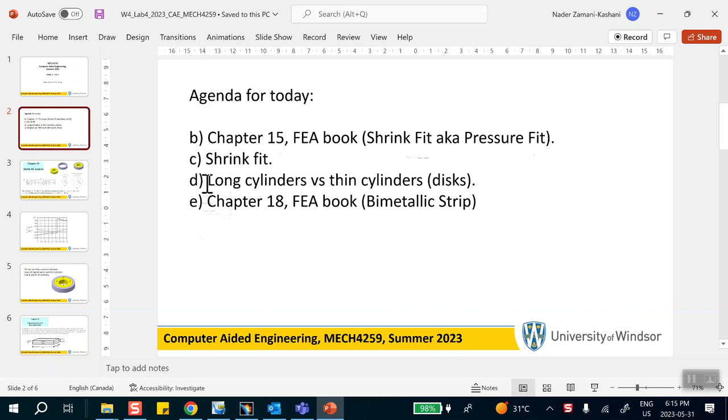Today, we're going to continue with assembly analysis. And on the agenda, I have basically two chapters that I want to do. One of them is chapter 15, which is a shrink fit or press fit problem. And then I'm going to assume that these two things that are shrink fitted are actually thin discs, but we'll talk about that later. And then once I'm done with that, I'm going to do chapter 18, which is a bimetallic strip. So let's start with the shrink fit problem.

Suppose we have two discs like that. Let's pretend that these are actually not very long. So think about it as thin discs as far as the thickness is concerned. One of them is made out of bronze, and the other one is made out of steel. So the gray one is made out of steel and the yellow one is made out of bronze. Now, if you look at the dimensions here, you see that actually the outer diameter of the bronze is about 0.002 inches bigger than the inner diameter of the steel.

In other words, if you wanted to take this bronze piece, the yellow piece, and stick it into that gray one, it won't go through without damaging it. So the way they put this thing in there is heating up, for example, the steel piece to make it a little bit bigger, and then put the bronze piece in it, and then let it cool down. This is called the pressure fit or press fit problem. Because this bronze one is a little bit bigger than the steel one, it's going to get compressed, and the steel, once it cools down, is going to get pressurized from inside, under tension.

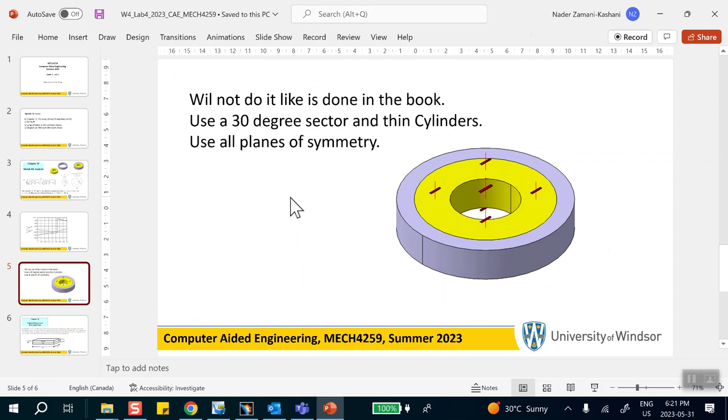If you take a thin disc, there is a plane of symmetry halfway through that you should use. If you're asked to use all planes of symmetry, and I'm asking you to use a 30-degree sector and half the height. I'm assuming that in this particular problem the height is 1, although it's not specified here. So when it comes to modeling, I use half an inch only.

So let's go ahead and make this thing, and because I know exactly what I'm going to be doing, half the height and a 30-degree sector, I'm not going to make the whole model. I'll just make that particular portion of it. So let's start with the product file. Immediately save it. So we go to File, Save Management, Save As, Desktop, New Folder, Shrink Fit. So this product is going to go there.

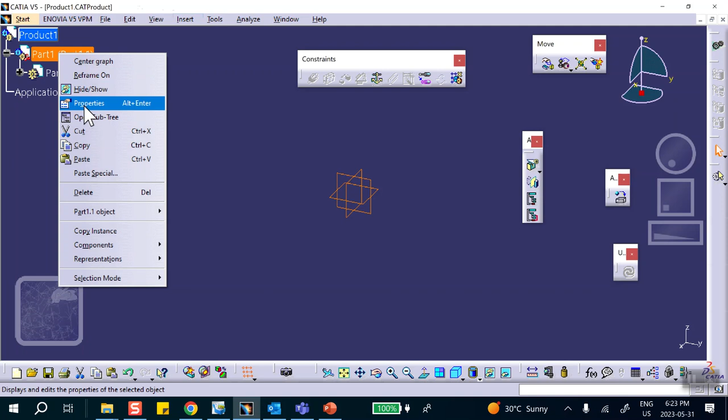And then I'm going to make a rectangle and shaft it to get the bronze piece and then to get the steel piece. So insert a new part in there. Let me do the steel first. Right click properties. This is steel outer ring. That is the instance name, and we go down here: steel outer. All right, so let's go make it. Double click on this. On that vertical plane, I will sketch a little rectangle.

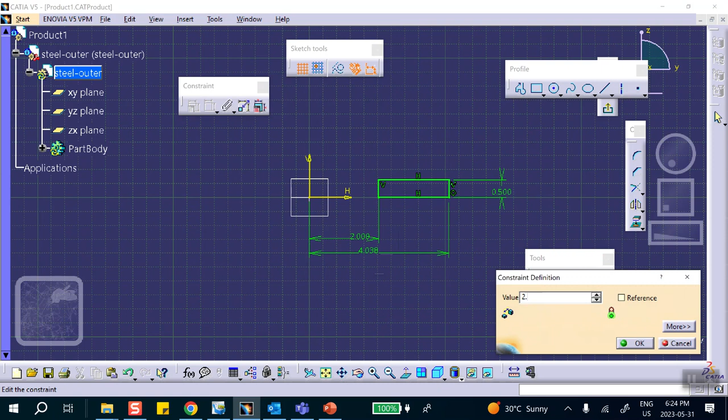The height of this rectangle is 0.5 because we're taking half the height of the assembly. The inside radius is 2. The outside radius is 2.5. So let's go put some dimensions there. These are in inches. From here to here, this is 2. And the outside, the dimension from here to here is going to be 2.5. And we say OK. So this is the steel ring, exit.

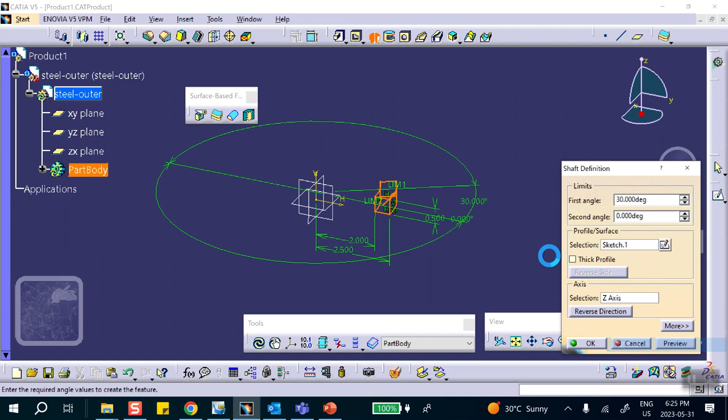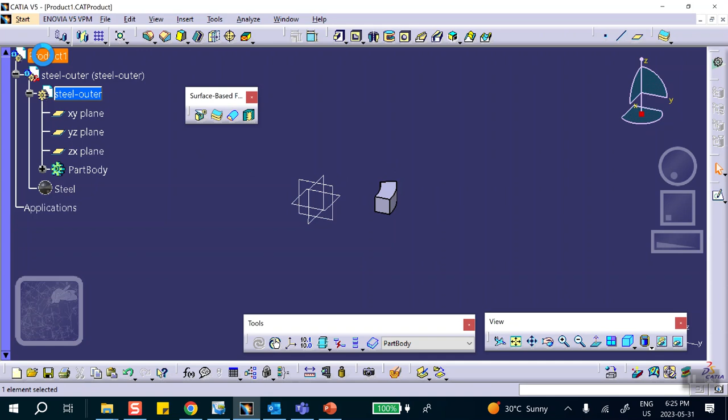And shafted by 30 degrees. I put the cursor there, right-click Z. There we are. So this is the steel piece. And I'm going to put material properties on it. So apply material, steel on that part, and we say OK. Good. Now we're going to make the bronze piece. So we go all the way to the top, click on the floppy so that everything is saved,

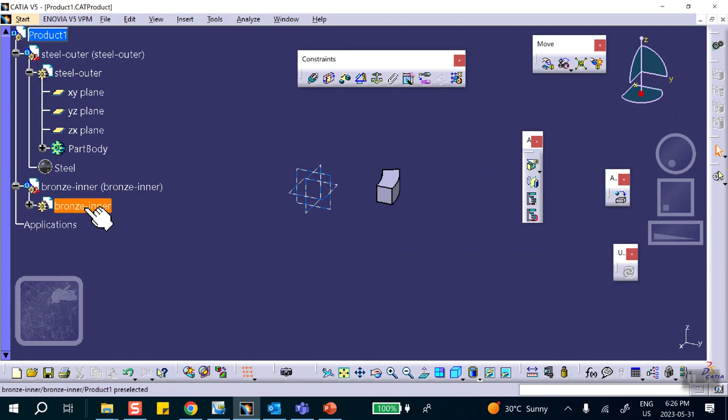and then insert a new part, say no, and call this thing bronze, properties, bronze. And this is the inner piece. This is the instance name, right click copy, and there's the part name there. Paste. There we are. We say OK. Let's make it. Double click on this. On that same vertical plane, I will sketch.

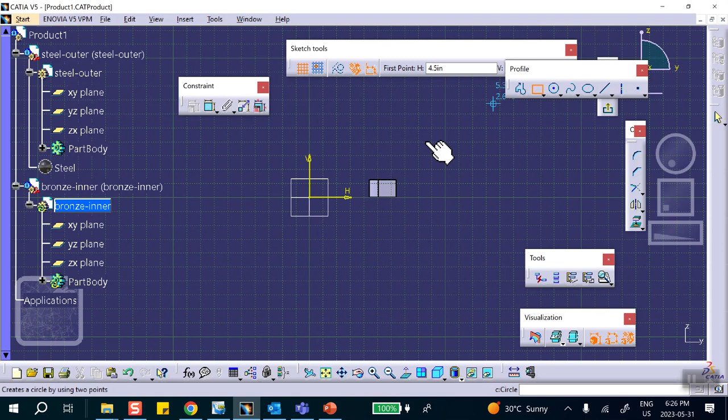Now, the inside radius is 1. Remember, the nominal outside radius is 2. Although it's a little bit bigger, 2.001, we don't gain much by changing from 2 to 2.001. So I'm going to use the nominal dimensions for making this. Let's make a rectangle. Clean it up. So the height is 0.5, just like the steel piece.

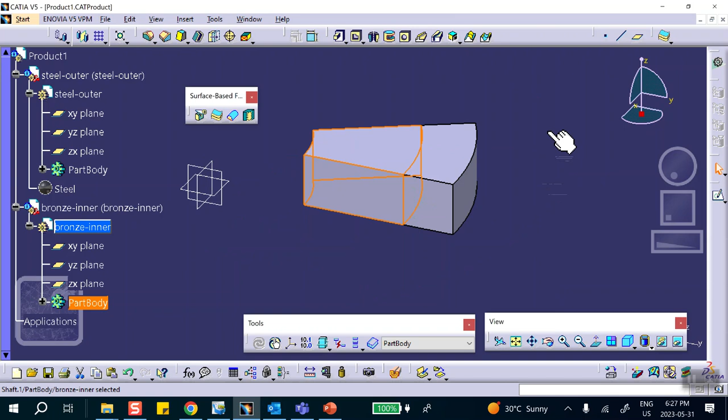And the distance from here to there was 1. And the distance from here to here is 2. Not 2.001, but 2. So notice that they actually touch exactly at the same location up there. So we exit, and once again we shaft it by 30 degrees along the z-axis. There we are. And let me change the color of that.

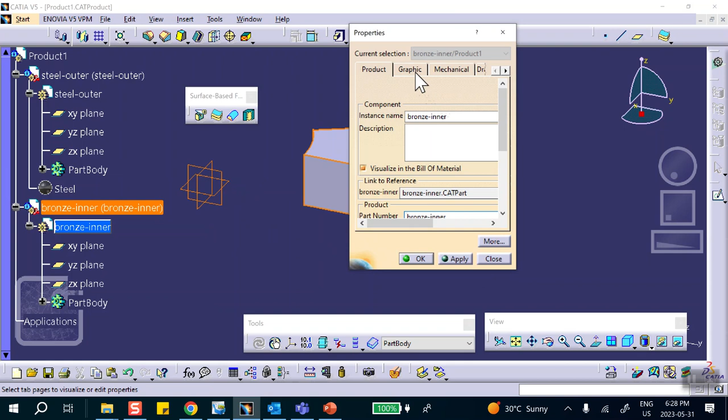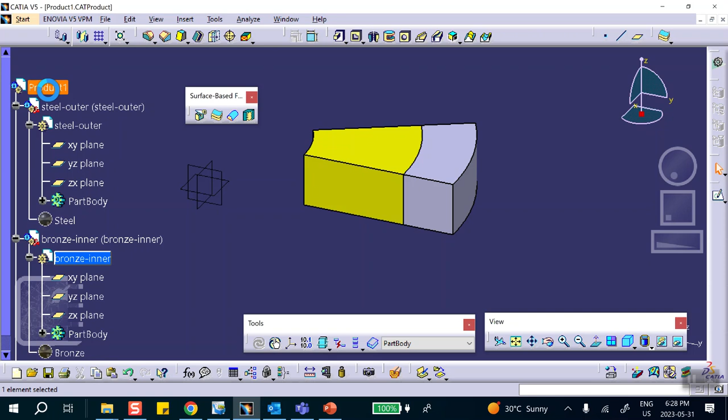Right-click, properties, graphics. I may have to do it from, close that. Right-click, properties, graphics. Make it yellow just so that it looks like that. And then I apply material properties on it as being that of bronze. So click on it, bronze on that part, say OK, and there we are. So all the way to the top, and save it, floppy.

Remember, if this was a problem on the final or on the midterm, you have to give us the bronze piece, the steel piece, the product, and the CATAnalysis file that we're going to do later on. Okay, good. That's pretty much it.

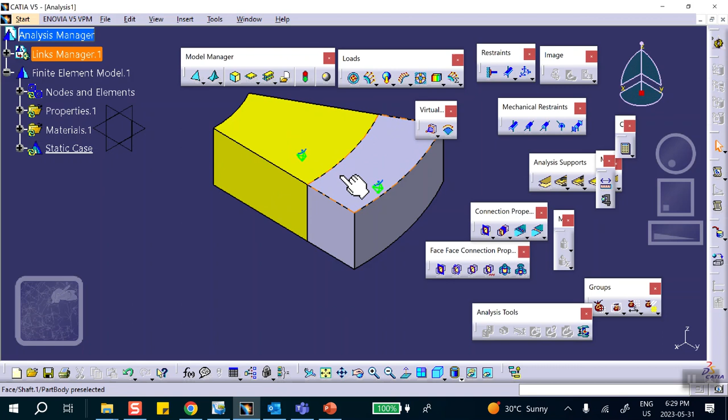So we're going to go to generative structural analysis. CATIA sees two solid objects. Immediately it meshes it right there. You can see that. Since I know that the critical area is around this seam, I'm going to refine both meshes around that. So we know how to do this, right?

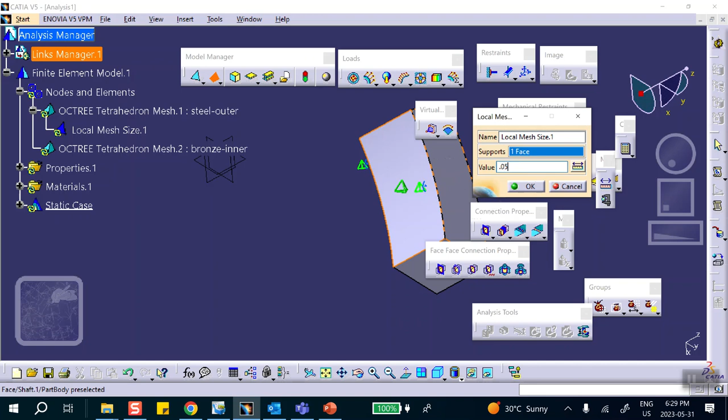So you go to local mesh size. It says you have 2 elements. Which one do you want to refine first? So let's do the steel first. Click on it. It says, okay, where? So let me hide that guy. And I want to define it right here. And the value that I want to put is 0.05. How does it look as far as the size goes? Yeah, you can see that. It's smaller than that. Very good.

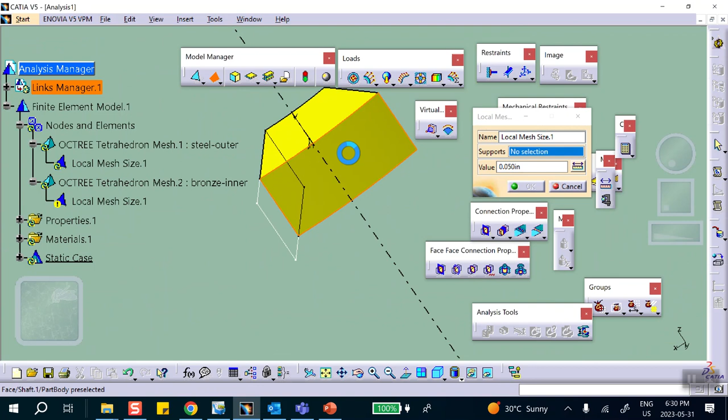Now we do the other one. So once again, local mesh size. This is the one that we want to refine. And where is it that we want to do it? It's over here, right? And I use the same number. Okay, so let me bring this thing in the front so that you can see what's going on right there. And if I mesh this thing, I'll see that I have a finer mesh there.

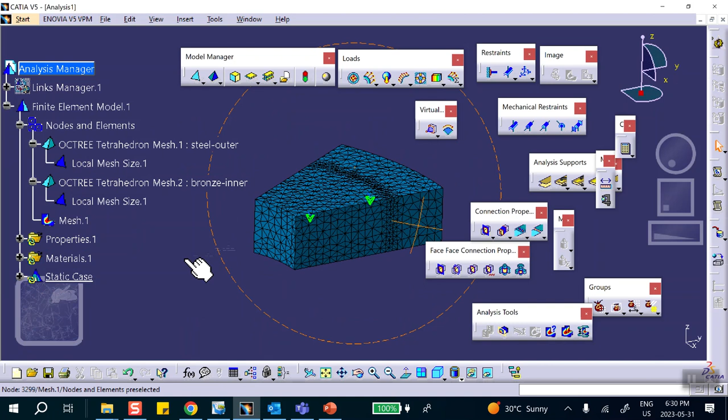By the way, if you change this rendering to wireframe, you can see those two elements that I refined right there. Okay, so let me put this thing back where it was. Right-click, mesh visualization. You're familiar with this. And you can see that around the seam, the elements are finer. Okay, good. That's pretty much it. So let's deactivate this, deactivate that. Okay.

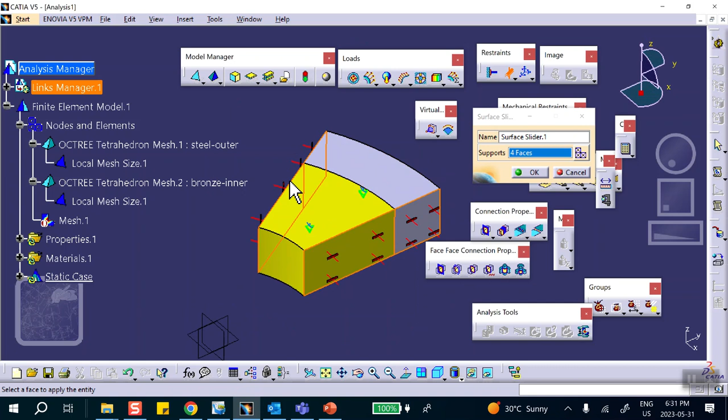Surface slider, planes of symmetry, surface slider. So this face and that face. This face and that face. Remember, I'm not using the local axis system here just to make your life harder. When I did the rotating disc, I created an axis system and used it, etc. But I told you that surface slider will do the job. There I wanted to show you how that particular feature worked. That's why I did it the long way. And the bottom surfaces of the bodies are symmetry planes, right?

Good. Now, what I need to do is create an analysis connection. To do that shrink fit thingy, I have to do an analysis connection between the face of the steel and the face of the bronze. So I click on that. I'm going to hide the bronze. For the first component, I select the face of the steel. For the second component, I select the face of the bronze right there. Let's bring this in the front so that you can see what you have done.

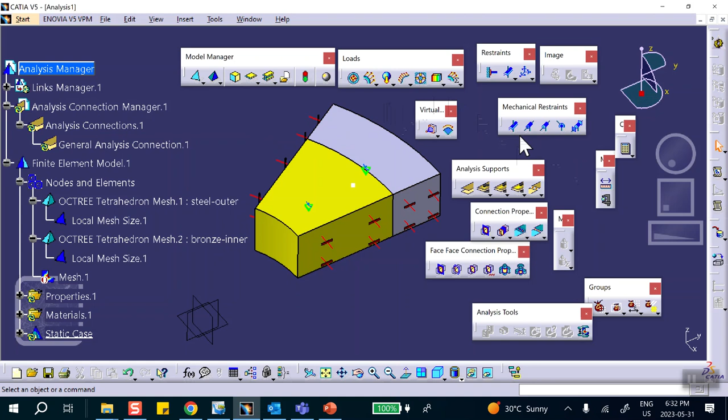Notice that I created a connection right there, that little white dot. And in fact, it's right here. Okay. And let me see for a second. This is a shrink fit. Where is this thing? Let's look at the face connection property. Once you create your analysis connection, you go to face connection properties.

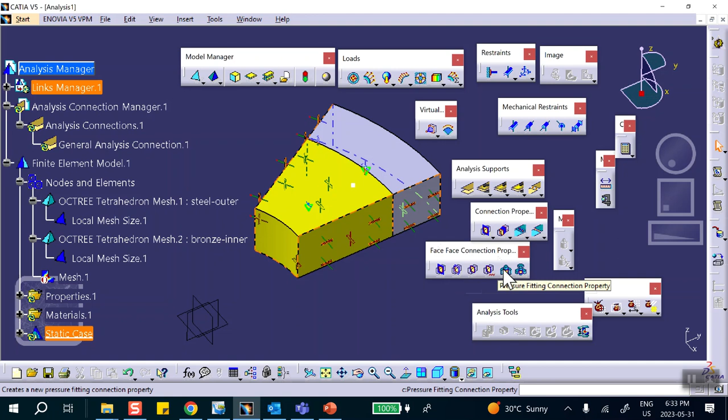Scroll here. This was contact. This is a pressure fit or shrink fit, either one. Okay, and you click on it. It says, where's the support? The support is right there. And the radial interference is 0.001 inch, half of the diametral interference. And you say okay. This will automatically take care of the contact. In other words, there is no need to go and create a contact between these two faces.

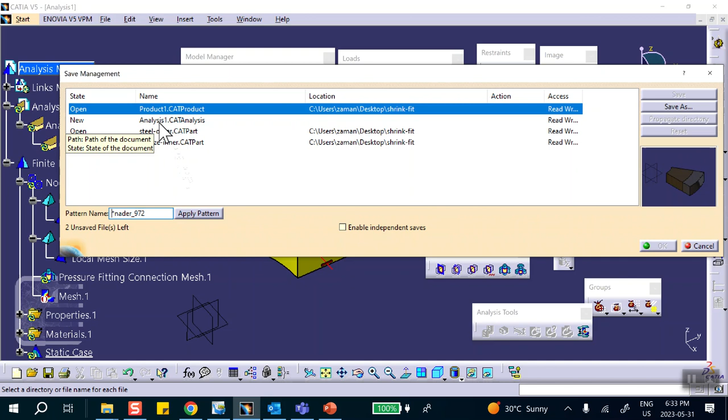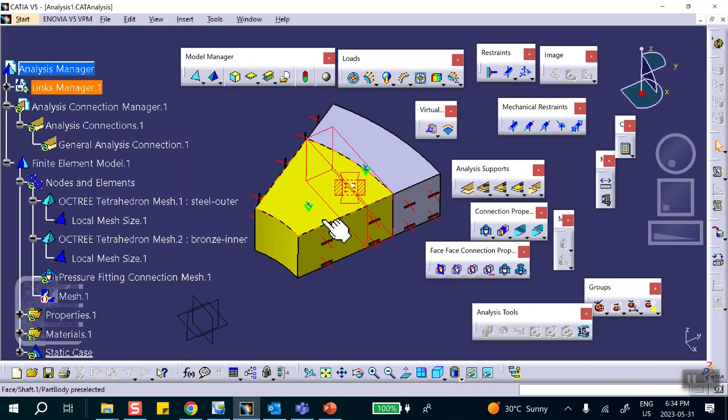Let's go and save our analysis file. So file, save management. This is the analysis. Save as. In that same folder, shrink fit, the analysis is going to go. We say okay. And if you go and check that folder, shrink fit, there should be 4 files in it: the product, the bronze, which was the inner piece, the steel, which was the outer piece, and an analysis file. Okay, so let's go ahead and run it and see what happens.

I can't remember whether I used linear or parabolic, but I don't have a very fine mesh here, so either one should go through without any glitches. We'll see. It's doing it. See, the icon for pressure fit is something that looks like exactly what we did, something inside of something else. You see that here. Okay,

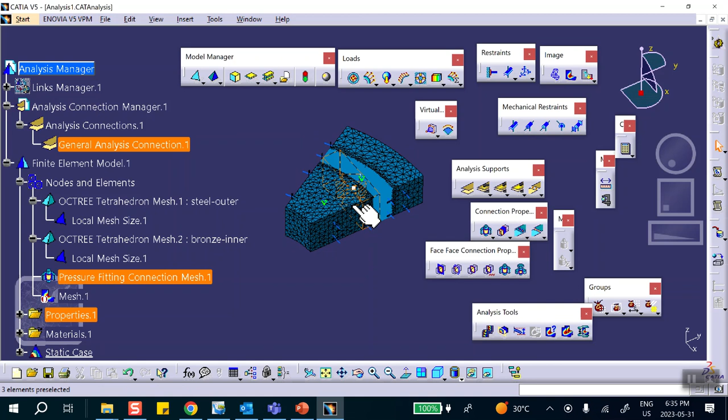done. So first, let's look at the deformation. There we are. Now, if you see what the heck is this, notice that the steel is going to be pushed out. The bronze is going to be pushed in by the steel, okay? And so in order for us to be able to see things on the screen, the CATIA program multiplies these by a factor. For example, 1,000 times make the displacement here bigger outward, 1,000 times displacement bigger here inward. And this is why you think that there is a gap there.

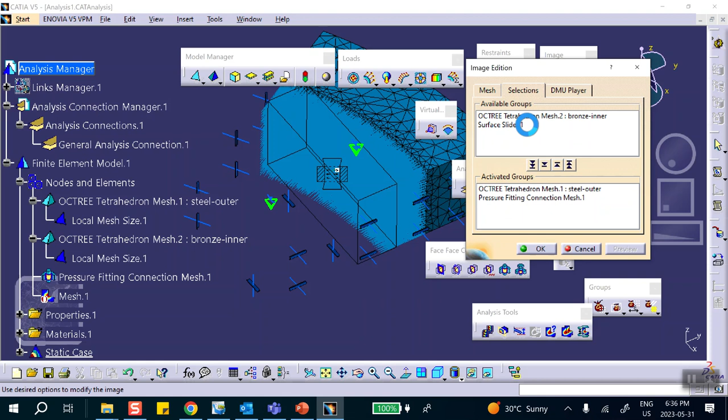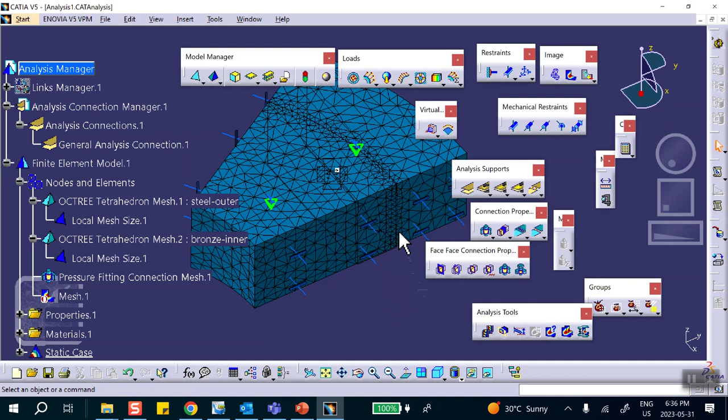To see the real stuff, first of all, I don't want to see these elements here. So let me double click on that. Selection. I don't want to see this pressure fitting connection stuff. All I want is the mesh for the outer ring and the mesh for the, oops, not this one. Not this one. The mesh for the bronze inner ring. This is all I want to see. I don't want to see these other things there. And the scale should be 1 to see the real deformation. So I'll make this thing 1. And you see that they're actually touching each other. It should be.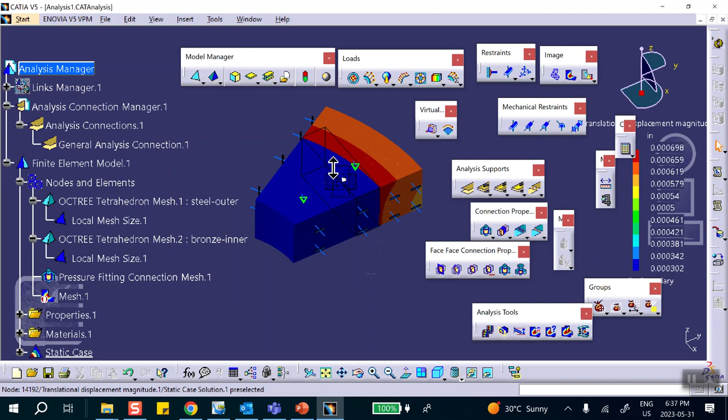Let's look at the displacement. Double click. First of all, we make it average ISO. Okay, good. We don't want to see everything. We just want to see the first one and the second one. Good. And we want to set the scale equal to 1. And this is the real view. So material shading. There we are. Okay. Now you can see that this is the displacement, right? Magnitude of the displacement. Very good.

Now let's look at the von Mises stress. There we are. You can see that there's a stress variation, rapid change in color. By the way, if these smooth colors bother you, you just double click on it and then say more. Actually, that's not what I wanted to do. Cancel that. Double click on the legend here, the colors. And when this thing opens up, click on more. Not more. Back up. This is the dot that I wanted to move. Let me cancel that. Try it again.

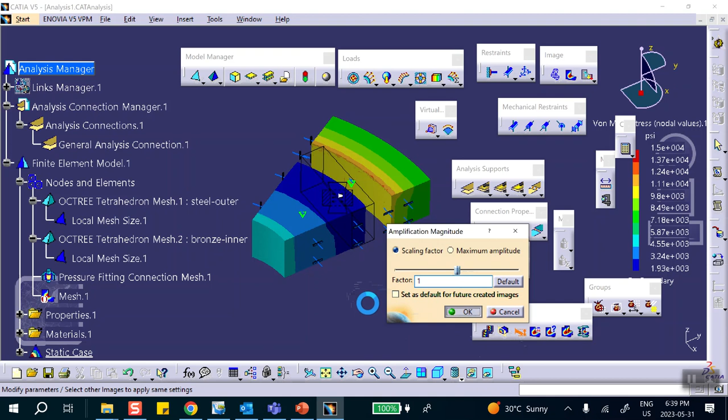Double click on this. It doesn't bother me, but if you want to see clear cut changes in color boundaries, click on these 3 dots. See that? These 3 dots. Click on it. Say don't show me smooth. Uncheck it. Say okay, and say okay. Oh yeah, you see that? The colors are not merging each other. You can see the clear variation here. And let's change the scale to 1 here. Good, good.

Now, if you want to see the pressure at the interface, here's what we're going to do. I'm going to deactivate, which then you can, of course, compare with this number once you plug in all the information that you need for bronze and steel. Okay, but let me deactivate this. I can see that this is slowing down for me. It won't happen to you at the university because the computers are a lot faster. This is a laptop, it's not doing very well. Deactivate this, and let me hide that for you.

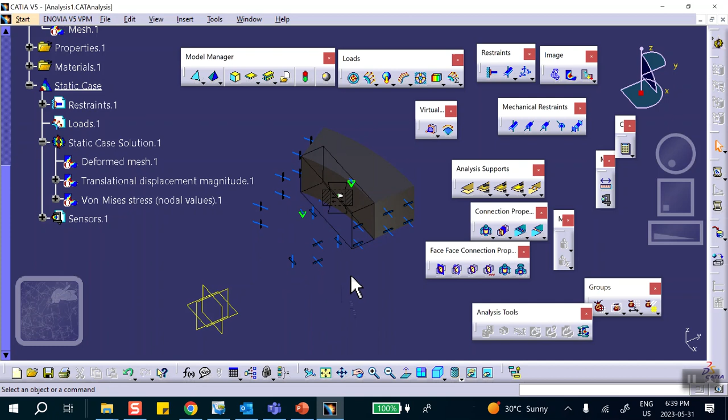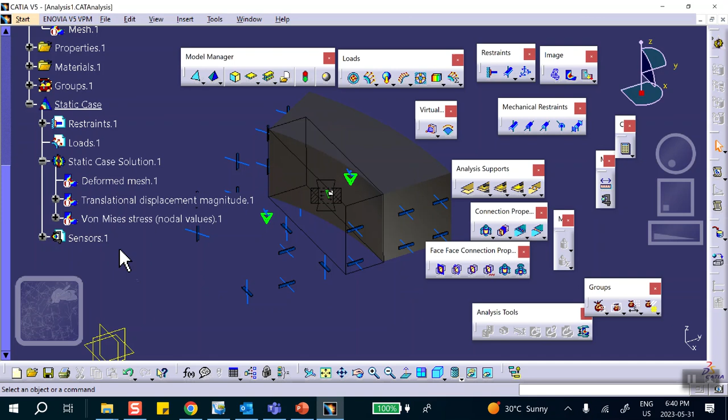Let me hide that, and then we're going to say, okay, what I want is actually only the stuff on that surface. So that means you have to create a surface group. Here's the groups, and there is line group. This is surface group. It says, okay, where? On this, or on the bronze side. Okay, but I'll leave it like this. And then when you say, okay, show me back the von Mises stress, either double clicking on it or activating it, it says, I don't want to see everything. I just want to see the surface group. This is the one that I created. Just show me the surface group right there.

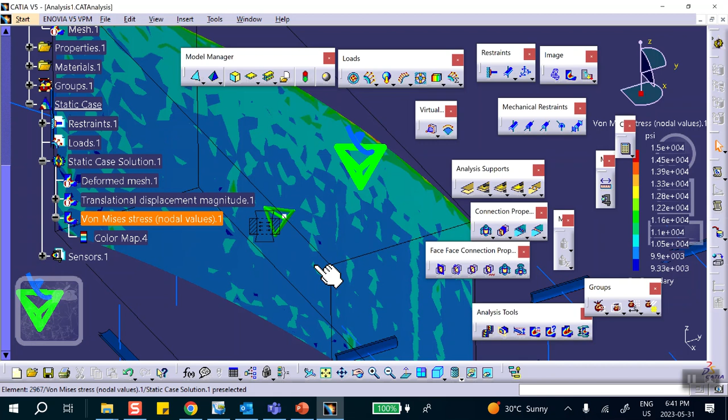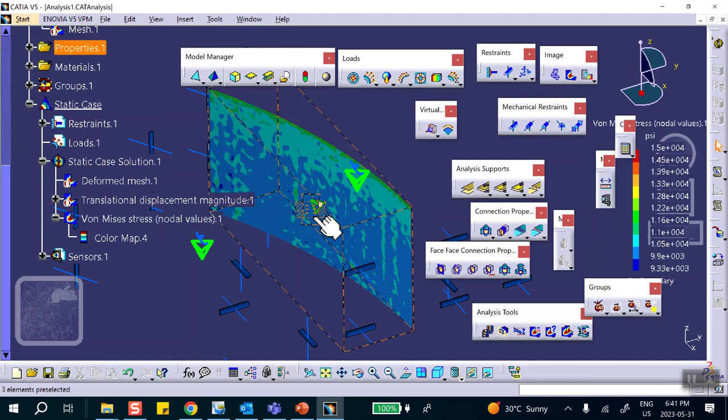Right there. And if you see that its color is weird, notice that on that face, I have a constant value for the pressure, essentially. So this is all numerical error. If you put the cursor on it, you see that the numbers are around 10,000 psi. The von Mises stress at the interface is around 10,000, 10,400, 10,500, 10,600. The moral of the story is that this is all numerical noise. And this number, roughly 10,000, 10,400, 500, you can go and compare with this once you plug in the values. All right, folks, so that takes care of our first problem.

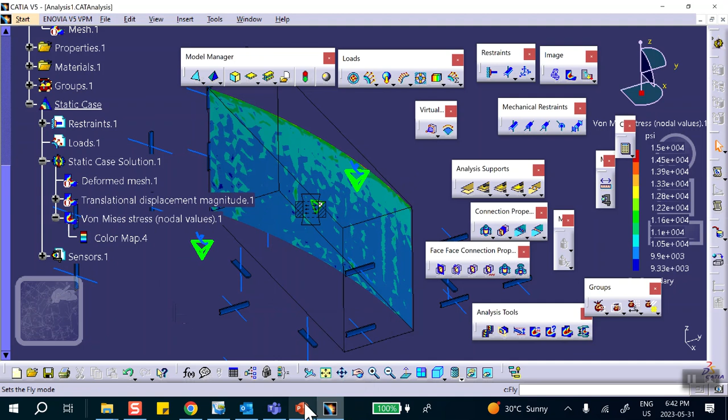Notice that in the lab, at least I think in the afternoon group, if I'm not mistaken, I'm asking you to do a homework which is fairly similar to that, except that the geometry of the outer ring has some holes on it. So if you're doing that, then obviously this formula is not valid anymore. If you have a bunch of holes here, this formula is not valid. This is only for two uniform disks like that, okay? And then you have no choice but to do it with finite element.

So let's go to our next problem, which is a bimetallic strip. This is the fundamental idea behind the old thermostats, where two dissimilar metals were bonded together. For example, here aluminum and steel: aluminum has a higher coefficient of thermal expansion than steel. These are fully bonded together, and if the left faces are clamped, then when the temperature goes up, because aluminum wants to expand more and steel will not, this will either go up or down. We'll see what happens later on and come back to analyze it, okay?

All right. Okay. Now, something else. You're asked to use as many planes of symmetry as possible. In this particular problem, notice that this is a plane of symmetry, so you can cut it in the middle and vertically down. There's only one plane of symmetry, so instead of going 1 inch, we go half an inch, okay? So the top is aluminum, the bottom is steel, and we'll see how things go, okay?

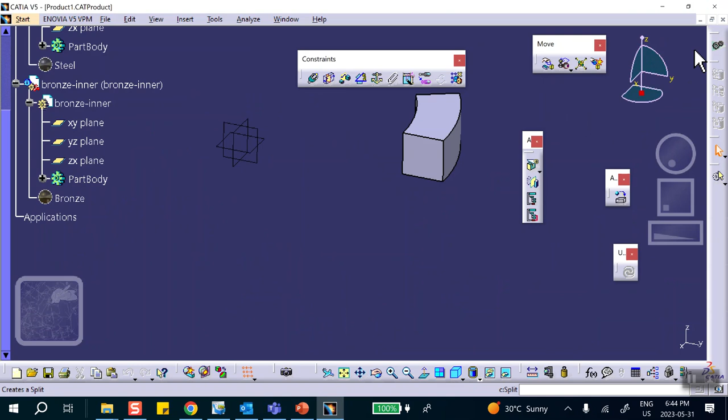So let's go out here. I'm not going to save any of this stuff. I'm going to cancel that, cancel this. Start with the product file, and immediately insert a new part in there. Right click, properties, and call it top piece, aluminum, or aluminium. I'm not sure which; one is going to be a typo in CATIA. We'll find out. Okay, so right click, copy, paste. Say okay.

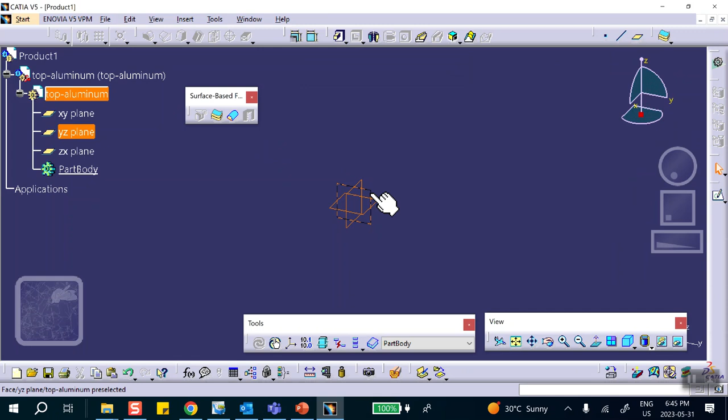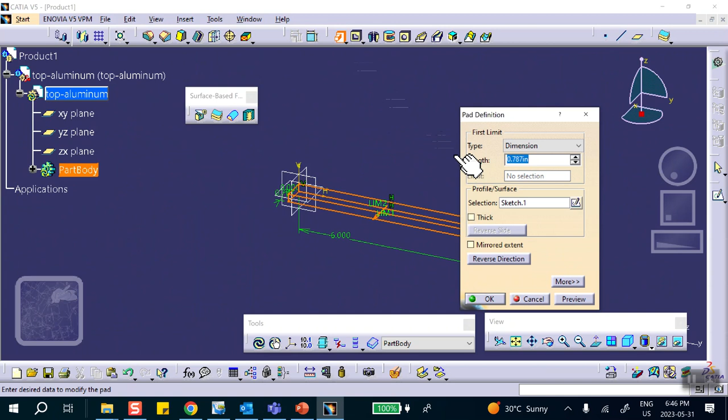Let's go make it. Double click on that vertical plane. I will sketch a rectangle which is 6 inches long and 0.25 inches high, and then padded by 1/2 inch. Okay, so this is 6 inches, and this is 0.25. Okay, exit, padded by 0.5. So what you see here is half of this top piece.

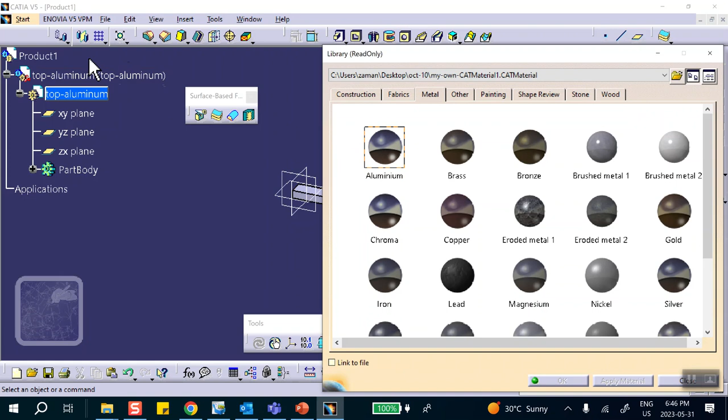Now we have to apply aluminum properties on it. So you apply material here, aluminium. Be careful, because this can cause you problems later on after the midterm. Aluminium, not aluminum. So on that part, say okay. Now let me double click on this. If you click on the analysis, you see the coefficient of thermal expansion here. This is what is needed, but it's at some reference temperature, and the reference temperature is the room temperature. I'll show you what that is.

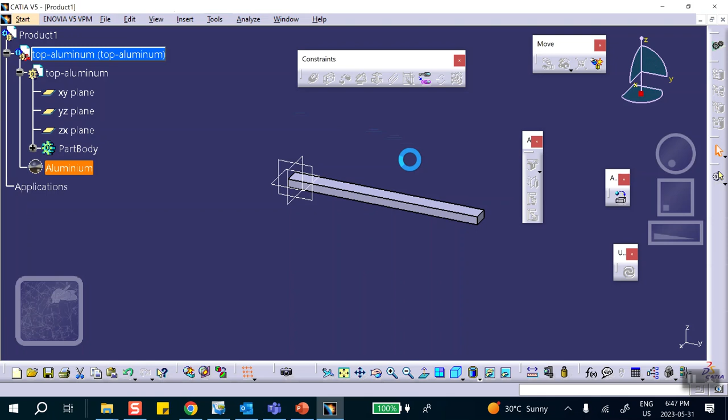We can always change this to degrees Fahrenheit. We have time, let me do that. Tools, options, under parameters and measure, they're ordered alphabetically. Coefficient of thermal expansion, let's see if we can find it. Unfortunately, I cannot search this, so you have to be patient. Thermal expansion, maybe. No, this is thermal conductivity. First of all, temperature: let me change it to degrees Fahrenheit while we are at it. Okay.

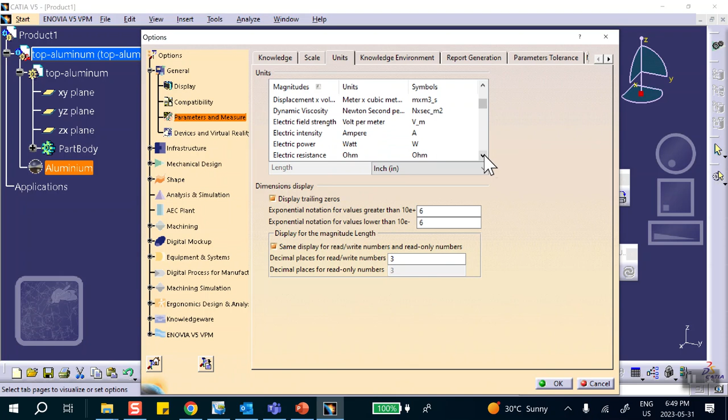What? So far, we changed the degree. Let me see what the exact name of that thing was. It was thermal expansion. Okay, let's try it again. Tools, options, thermal expansion, right? It's hidden somewhere.

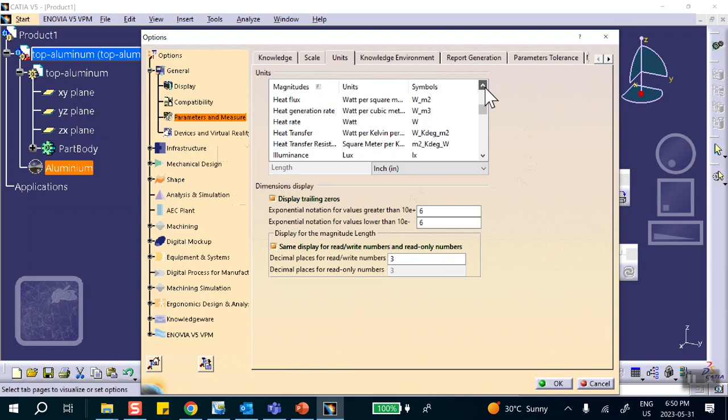Yeah, I don't see it here. So it really doesn't matter because it is the correct value, but it's in different units. It's gonna use it. I cannot find thermal expansion coefficient here. Let's try it one more time. No, that's okay. Just leave it the way it is. Okay, fine. Now, let me go and share.

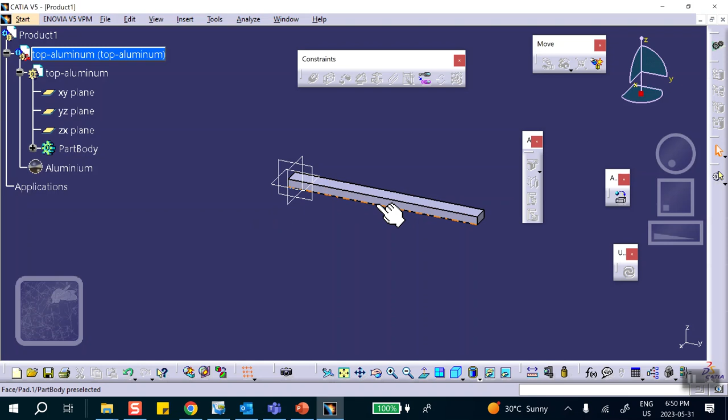This is aluminum on the top, right? Yeah. So now we're going to go there, insert a new part, say no, and I'm going to change the name of this thing to be bottom steel, right click properties, it's the bottom steel, and bottom steel. Okay, good, let's go make it.

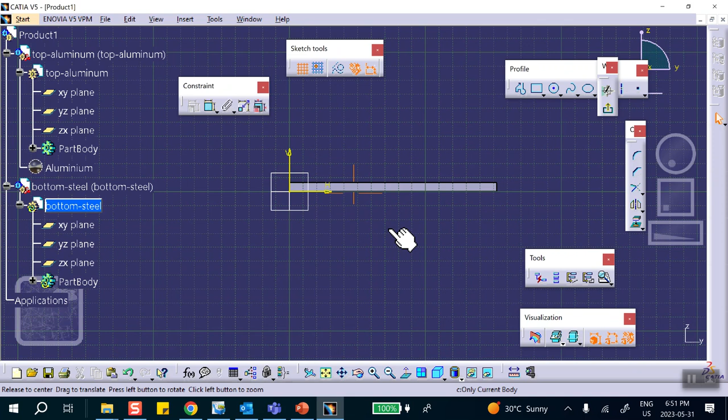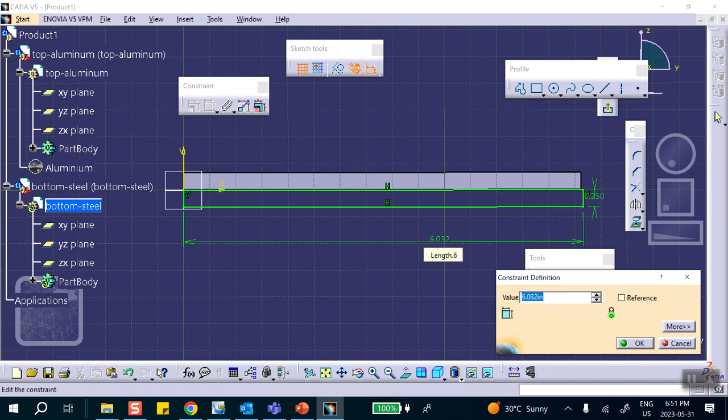Double click on that vertical plane. I will sketch a rectangle just like that, same dimensions. So let's see now, this was 0.25, right? This was 6. Very good. Exit. Oops. It was 6, right? Let's go back here and see what it is. 6. So that top one must have been wrong then.

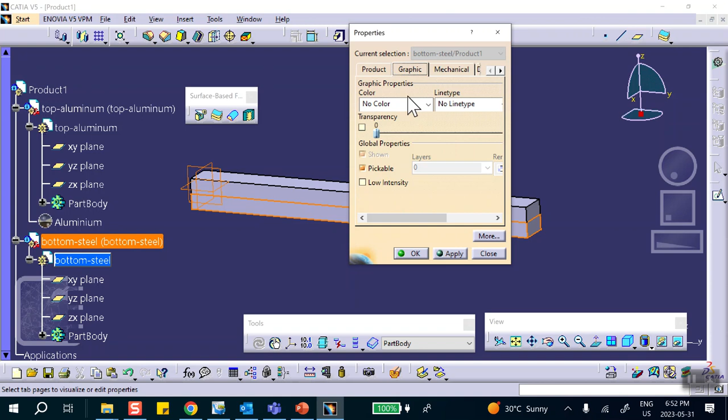Is it? Oh, let's see. Maybe that's an illusion. Oh, yeah, that's an illusion. If you look at it like this, they line up. You see that right there. Okay, and then pad it by 0.5. Okay, let me change the color of this. Right-click properties. The steel, I'm going to change the color to something else, maybe yellow. Okay, good.

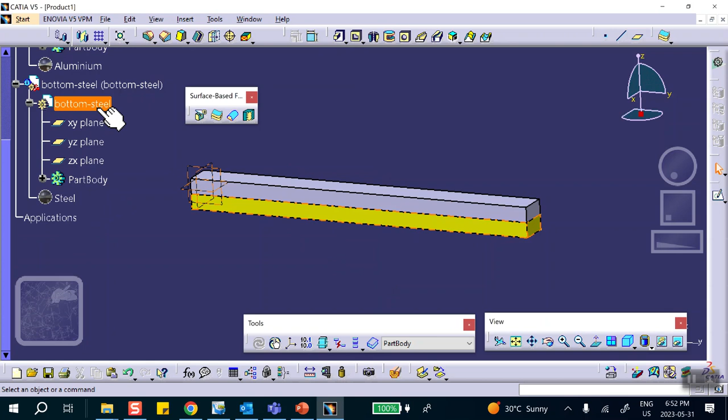Now, let's apply material properties to it, made out of steel. So, where's apply material? Right there. Steel on this part. We say OK. Good. Now remember, don't forget to save these things, etc. So now we're going to go to start, analysis and simulation, generative structural analysis. It's a static analysis we're doing.

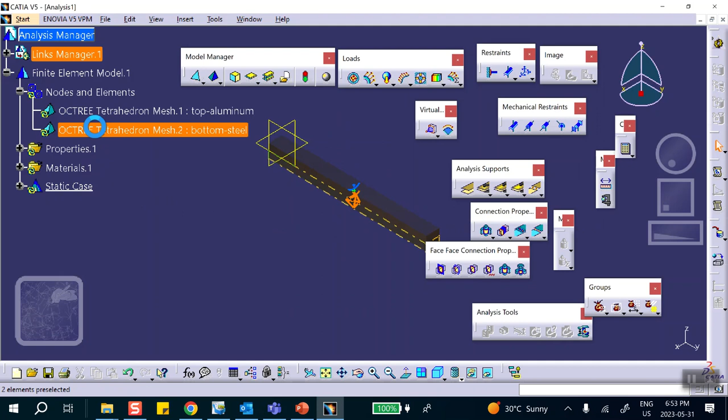These are horrible elements as far as the size goes. Let me make this thing 0.1 because remember this whole thickness was 0.25, and it's parabolic by the way. That's fine. And also this one is 0.1. Just so that this thing runs maybe faster, I'm going to double click. I'm not going to use parabolic. I'll use linear. Okay, very good.

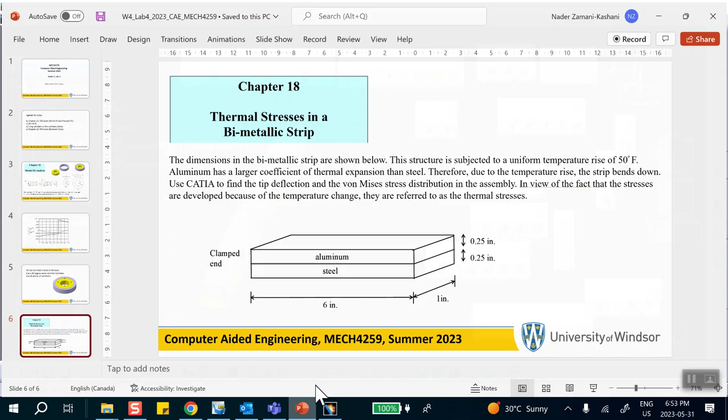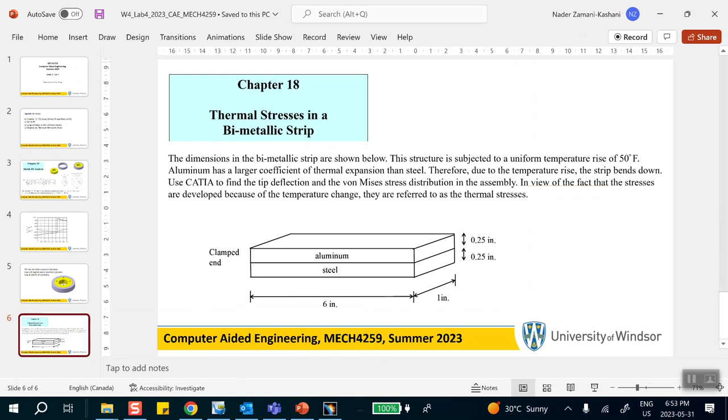Now, what do we know? Let's change the rendering here. Okay. So these two end faces are clamped. So click on this. This is clamped, and this is clamped. Okay. We took a cut here, right? We took a cut right there. So what we do is, we put the surface slider there. So surface slider there and there.

Now, we know that these two pieces are fully bonded. Fully bonded means that they are, another way of saying it, welded together or fastened together. You know what? Let me show you what happens if I actually did not make it fully bonded, but instead I made it sliding on each other. That's wrong. This is not what I want, but I want to show you that.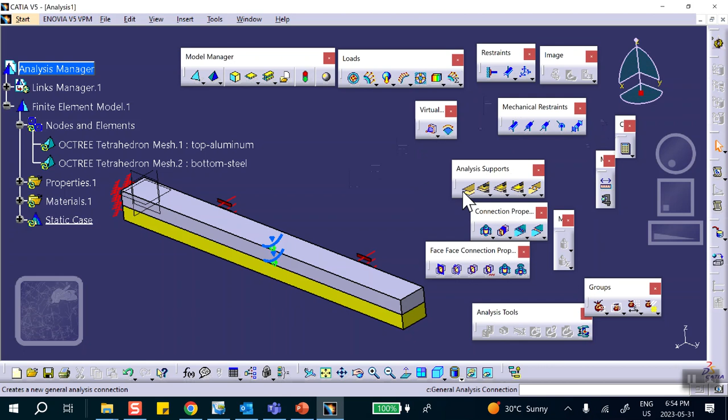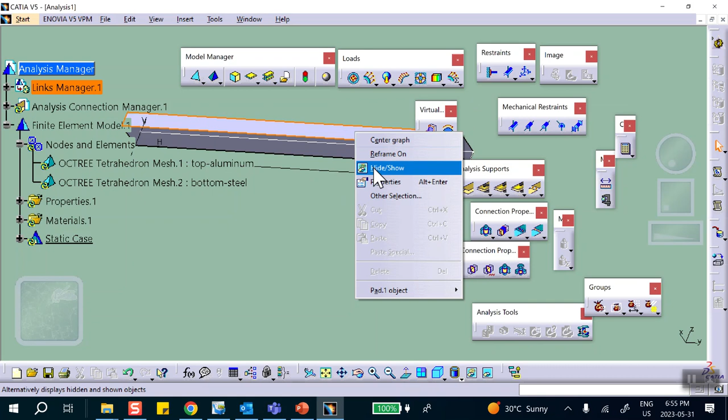Okay, first of all, create an analysis connection. First component, the order doesn't matter, top face of that. Second component, bottom of this, right? Yeah, bottom of that. This was the aluminum piece, right? Yeah, good. Let's bring this in the front. Okay, good. So I created an analysis connection here, and I'm going to make this thing contact.

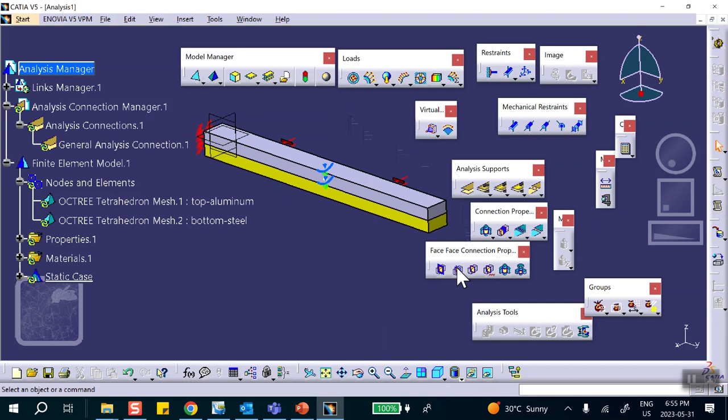It is not contact because we said it's fully bonded. Fully bonded means that they're welded together, or think about it as fastened together. But let me show you what happens if you actually make it contact. You know how to make contact. Face-face connection, right there, contact. That's going to be contact. And never mind about these. We're not using these guys. We say okay.

Now, where is the load coming from? If you look in this toolbar under loads, this one we have never used. It says temperature field. You click on it. It says, okay, temperature, right? First of all, let me clear this so that you don't get confused. This is under a temperature rise. You see that there's a big T here? And this is under a temperature rise. But the question is what? Let me put 50 there for you, okay?

Because this says temperature. It doesn't say temperature rise, okay? Let me put this thing as 50. This is wrong. You'll see why. You say 50 degrees Fahrenheit. Remember, I changed my unit to Fahrenheit, so this is correct.

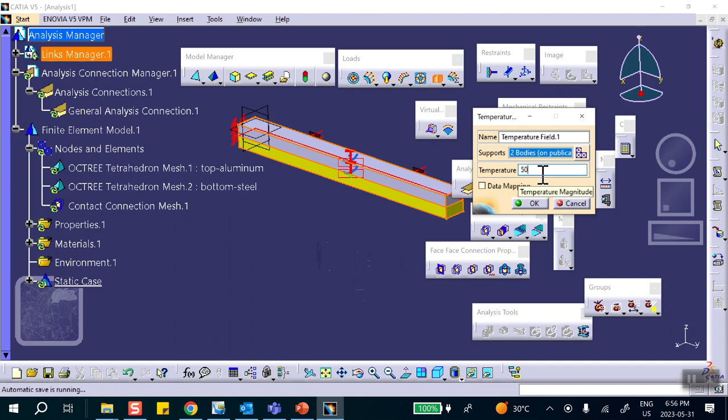Now, notice that this thing was not there. It came up because we clicked on that temperature. Double click on it. It says the room initial temperature. That means the room temperature is actually 68. So if there is a temperature rise, the actual temperature will be 68 plus this. If you make this thing 0, then 50 would have been okay.

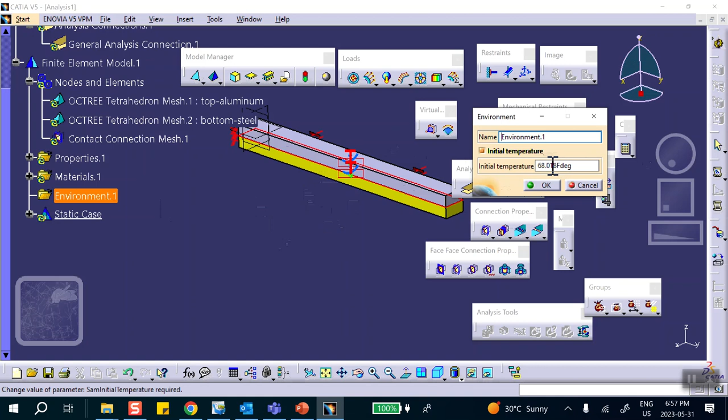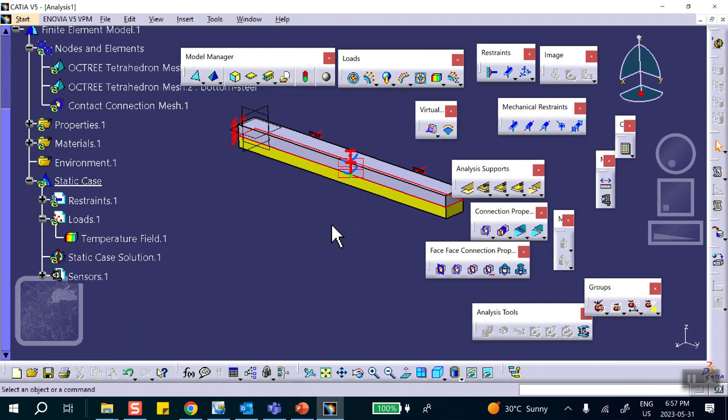But that thermal coefficient that we have in the database is associated with this room temperature. So we say, if that is the case, I'm going to go here to that temperature that I applied on the load, temperature field, and add to this 68. So it's going to be 118 degrees Fahrenheit, very close to it. So this is the actual temperature. Above the room temperature, that means we are dealing with a 50 degrees temperature rise. Now, if we run this thing, you will see something weird.

That's because of that connection that I created. Okay. You will see when I say show me the deflection, you will see that this top piece, which is aluminum, slides longer in the axial direction than the bottom one. Right there. You can see that. That's because these are sliding on each other. But they're not. The whole purpose of a thermostat, a bimetallic strip, is that they're fully bonded.

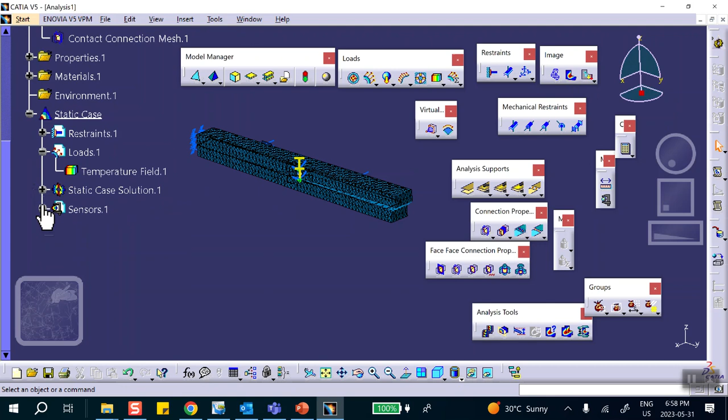So let me go ahead and just delete that, deactivate this, deactivate that. That contact property I delete. Now, when you delete it, you cannot delete it from here. Notice that in the nodes and elements, there is no right-click delete. You have to go to properties, right-click delete. Make this thing a fasten. So look at the face-face connection property right there.

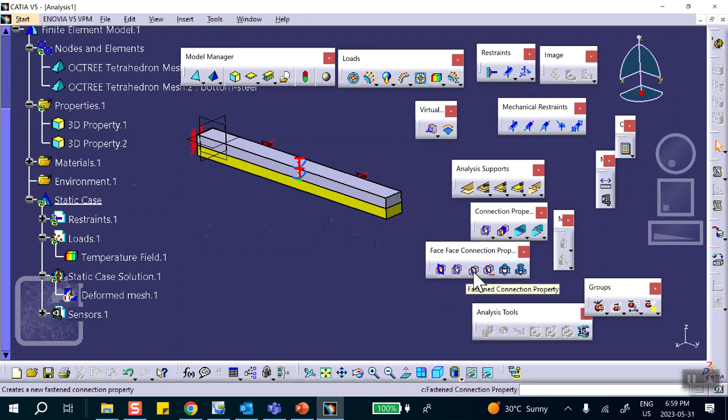Face-face, we have used contact, we have used pressure fit, right? The third one, it says fasten. Fasten means that they're fully bonded, perfectly welded, they move together. So you click on it and from the tree select that connection. Okay? And notice that the fastener sign appears here, right? And we're going to run it. And you see that it actually bends. That is the whole purpose of a mechanical thermostat, okay? And it goes actually down.

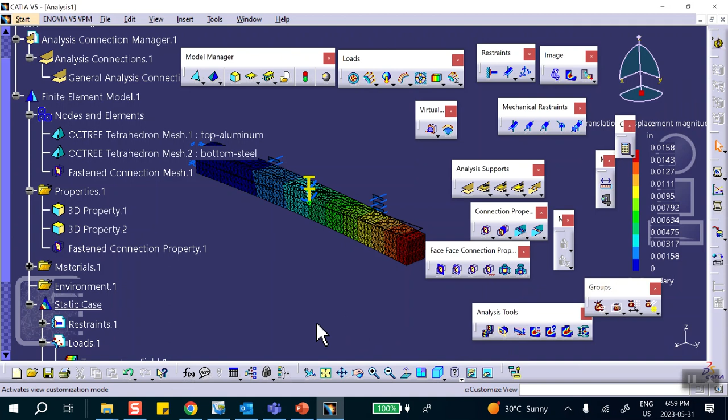So let me, what is this? So let me actually show deflection for you right there. Change this thing to average ISO, and rendering, change it to material. Okay, right here. Let me also show you the element edges. Okay, good. Now, what happens is that if you look at the view from the front, you see that it actually bends down because aluminum wants to expand more. It's on top. And the steel says, no, you can't go where you want to go. I'm going to limit your movement. This bends down.

So if this was a temperature drop, it'll go exactly the opposite side. If this was a temperature drop from the room temperature, this will actually bend up. Okay? So I want you to think about this. Just don't let it go over your head. One goes up, the other goes down. Make sure you understand what the issue is.

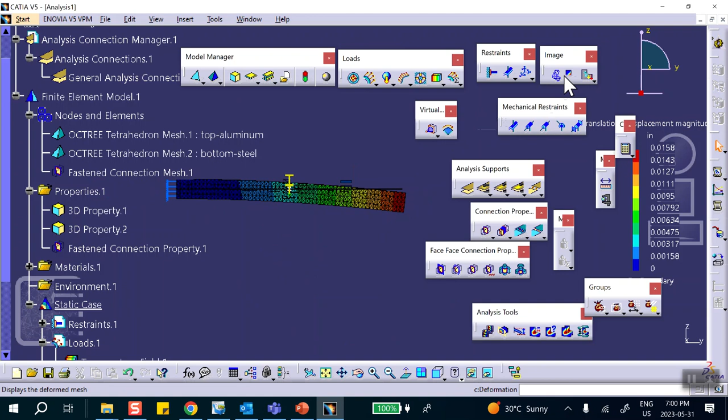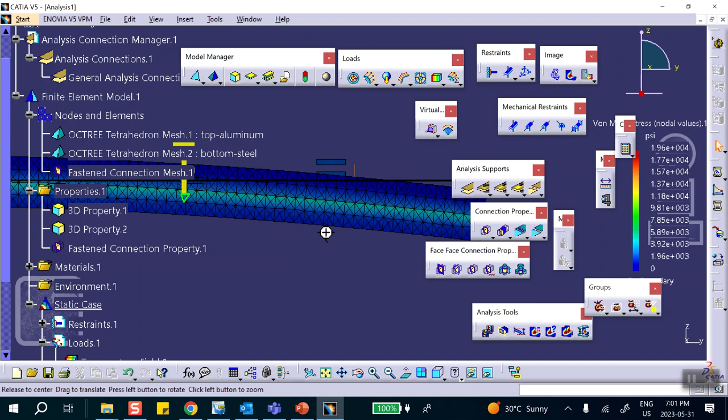And if you look at the von Mises stress, now you have to be careful because there is a discontinuity across that interface. They're two different materials. So it's not surprising that you have a sharp difference in colors. So you really have to be careful not to take these numbers for granted. You have to have a fine mesh above and below. Otherwise, this is just a good-looking color. Don't rely on the numbers. The overall behavior was okay, but don't rely on the numbers just by thinking about it.

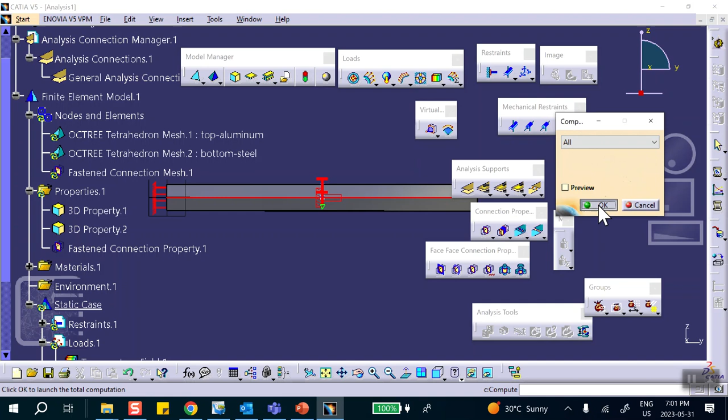So as a matter of fact, let's see now. By the way, notice that it looks like the biggest stress, if you trusted these, which I don't, is at the wall. Okay, let me go and do this thing with parabolic, see how much it matters. This is 1.96, this is 19,000 psi basically. So let's make this thing parabolic. Let's run it and see how much that value is going to change.

19,000. I don't necessarily trust that number, but I want to know. It's a good indication. Should I have trusted it or not? So we go down here, right click, von Mises, right click, activate. You see, 40,000. So it's so easy to generate these things without knowing how good they are. So one has to be very careful.

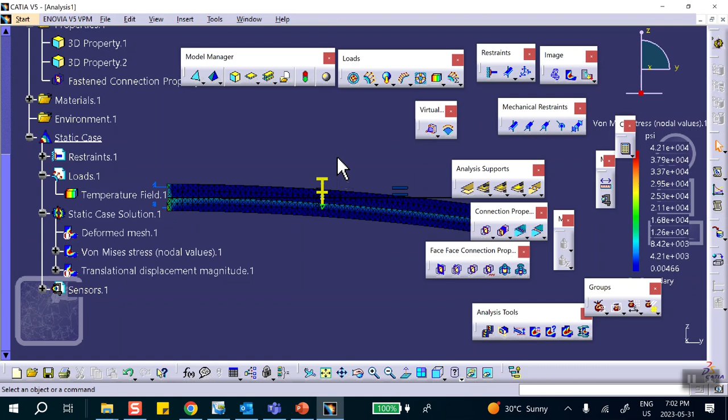I've already told you that this is a quick way of kind of discarding the results that you generated initially. You go from linear to parabolic, suddenly the thing doubles, okay? And from this point on, you really have to do a mesh convergence study, and you can't just trust these numbers, all right? So that takes care of our second problem.